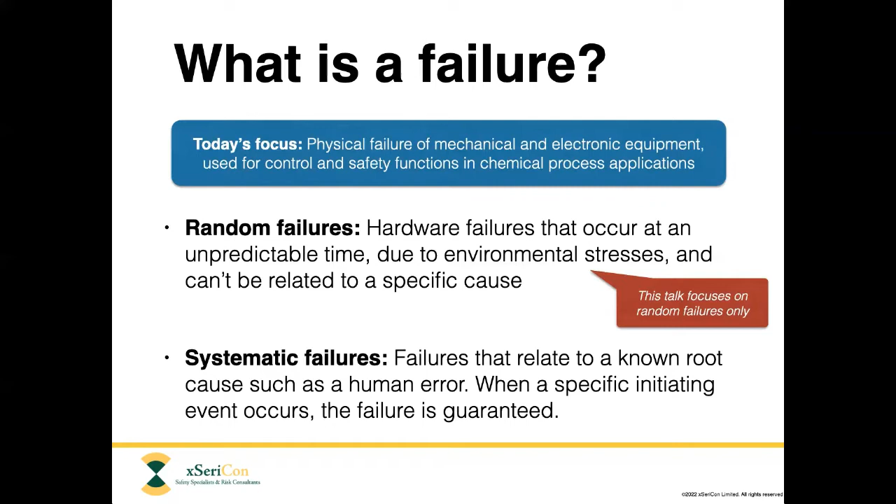And that's why we're going to be focusing today on random failures, because the approach you take for mitigating those failures is very different to those failures which can be prevented. So, moving on. Let's have a look at failure rates, and here is what is commonly known as the bathtub curve. It apparently looks like a bath. So if you imagine yourself lying with your head at the left-hand end and your feet on the right hand, you can see that it slightly resembles a bathtub.

This is a curve depicting failure rate against time in service. It's not the failure rate of a single piece of hardware. Rather, it's the failure rate of a whole population of hardware. So if you imagine a particular valve has been manufactured and there's 10,000 of them out in service, and if you plot how many of them fail against their time in service, you will expect to see a curve which very, very often looks something like this.

So we can divide the bathtub curve into three sections. You have your burn-in period. It's sometimes referred to as infant mortality. That's the point at which any weak items fail. So you start off with seeing higher failure rates early on in the time in service. Then you reach a point at which you have quite a low failure rate and relatively constant. It might be dropping slightly, but when we work with failure rates, we actually model it as a constant failure rate, shown by the green line there.

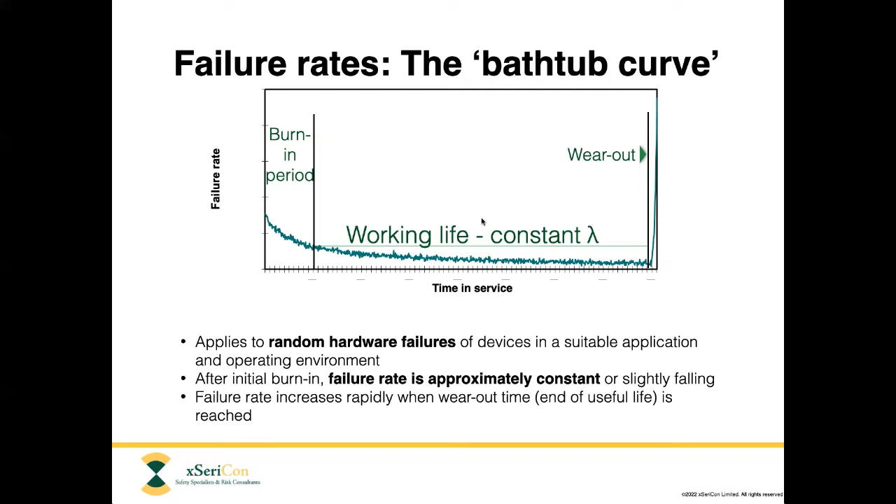So how do we fail? How do we express failure rate mathematically? You'll have seen this, the Greek symbol lambda, in the previous slide. That's the letter that we use to represent random hardware failure rates. And we assume it to be constant over the device's lifetime. Its dimension is in failures per unit of time. Of course, failures don't have a unit, so it's per time.

You might want to measure it in failures per year or per hour, but in safety systems particularly, and also in a lot of control systems, you would want far more reliable equipment. So another unit that's used is FIT, failure in time, and that's defined as one failure per billion hours. So that is approximately a failure every 100,000 years, I think, a little bit over that.

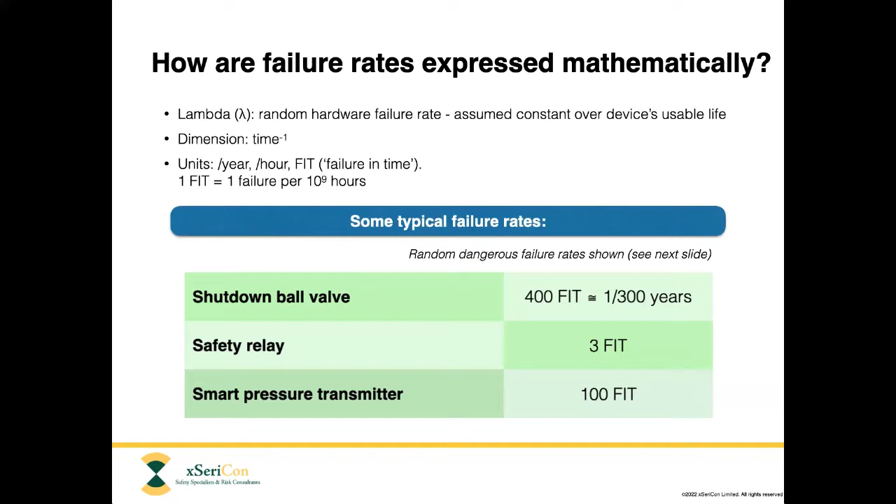Let's talk about failure modes for a little bit. So obviously with random failures, there's not a lot of point in talking about the cause, because we've defined random failures as those that it's hard to link to the cause. But we can talk about them in terms of their effect. The most important effect that we want to look at are what are called dangerous failures.

So a SIF, a safety instrumented function, that's a safety piece of equipment. A dangerous failure would be one in which, when it was required to act to bring a dangerous state into a safe state, it was unable to do so. Or if it's got redundancy, then you have loss of redundancy. So it's unable to, but there may be another piece of equipment that can.

So here's an example. We have a spring return actuator. It's required to bring the process into a safe state. And if it's spring return, you would expect that in most cases the spring would bring it to that safe state. If the spring breaks, then when you have loss of power and your actuator is unable to move under power, the broken spring is unable to move it into a safe state, and that would be a dangerous failure.

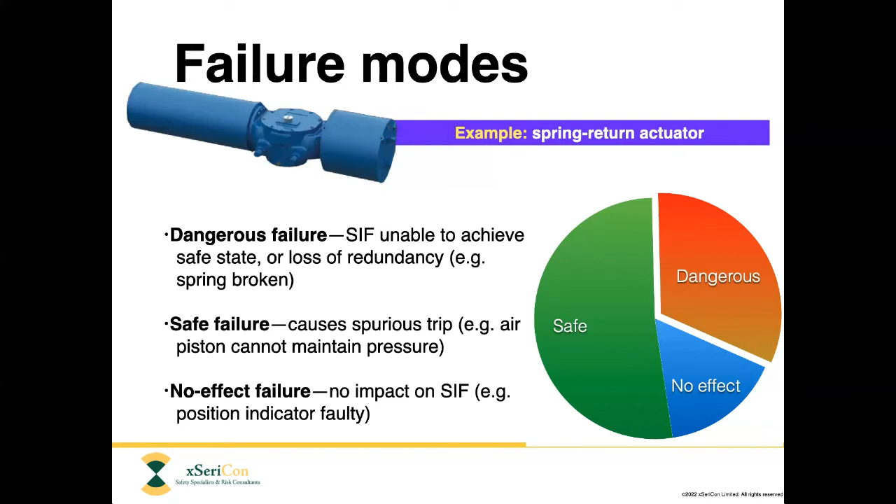And then there's a third one, just to complete the set. There's no effect failures. So there's some sort of failure on your piece of hardware which doesn't affect its ability to perform its function. So the example here is the position indicator is faulty. It doesn't perform exactly as it's designed to. Maintenance may find it difficult to perform checks because the position indicator is not correct, but when it's required to act, it's able to act, and so it's got no effect.

Just quickly look at other failure measures than lambda, the failure rate. You might have come across mean time to failure, mean time between failure, or mean time to failure spurious. Mean time to failure, I actually gave examples of when I was talking about the lambda. I said, well, a 400 FIT would be 300 years between failures. Just to say, it's the inverse of the failure rate. It does not mean that the device will last for 300 years.

It means rather that if you have a population of devices, and let's take an example, let's say we have 300 devices that all start service at the same time. We're going to put the conditions on that all of them will be replaced before or at the end of their useful life, and that any that break are repaired or replaced. You would expect to see out of those 300 devices an average of about one of them failing every year. And that's the meaning of mean time to failure. That 300 years is a collective measure still.

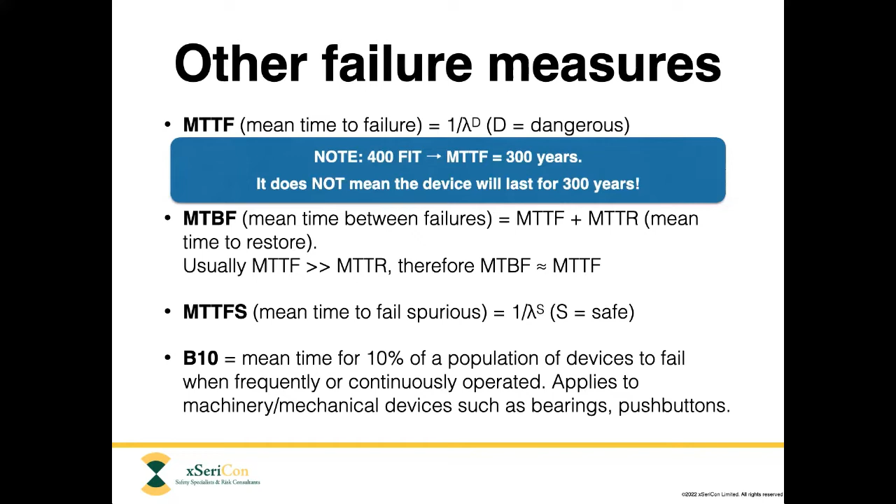It's important to understand the concept of mission time here because there's a common misconception. So let's first define mission time. You've heard me talking about the useful life. That's the bottom of the bathtub in the bathtub curve. It's the period of relatively constant failure rate. Mission time is the time that the engineers in a process determine they're going to leave a piece of equipment in before they repair, replace, or refurbish the equipment.

You can see here that it's quite obvious that the mission time should be less than or equal to the useful life of the piece of equipment. And obviously, because you're using a lot of different pieces of equipment, each of them has their own individual useful life. So if you were wanting to maximize your mission time for each piece of equipment, you would have different mission times for a lot of different pieces of equipment.

The reason it's important to understand this concept of mission time is because in projects that we've come across, a very common confusion is to confuse the plant lifetime with mission time. And that's fine if you have a short plant lifetime. But if, as you would typically expect, you have a plant lifetime of maybe 30 years, a lot of the pieces of equipment will have a useful life that's shorter than 30 years. And that confusion means that there's no planning for replacement of those pieces of equipment when they are well into their wear out phase of their life, and therefore the failure rates that were used to calculate the reliability of the equipment are not valid.

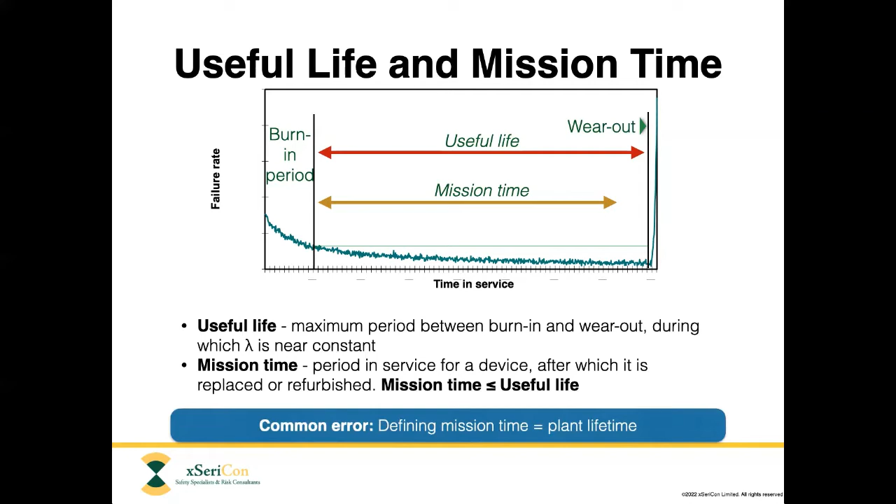Another approach is to do an FMEA, because when you have a product which has not been in service for long enough, doesn't have the millions of service hours required for the data for field performance, you could perform a failure modes and effects analysis. That's where you perform an analysis where you consider the components of the part, you consider the reliability of the components, you break down the failure into different causes, and it's a really extensive process for considering how the part might fail. Of course, it's not as good as field performance.

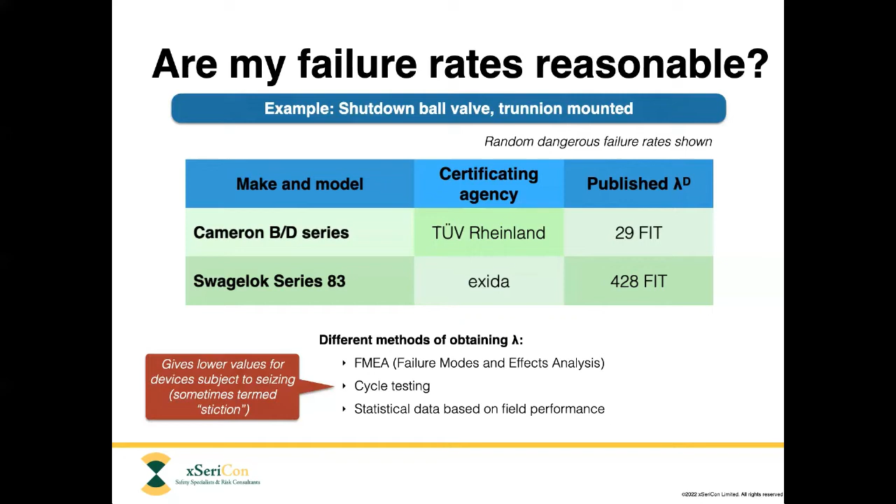So we've heard there from Joe, who's very nicely covered a description of what failure rates mean and where they come from. So the next question is, well, how do we use them and why are they important? And I'd like to give you some examples of the types of application of random hardware failure rates that we typically encounter in our risk analysis studies. And I'm going to cover 4 out of the 5 methods that you see on your screen now. The one I'm going to skip, just in order to save a little bit of time, is the third one, failure modes and effects analysis, or FMEA. If you're interested in FMEA, then please let us know afterwards, because we're happy to share our knowledge on that, and we could even run a webinar on that if there is interest.

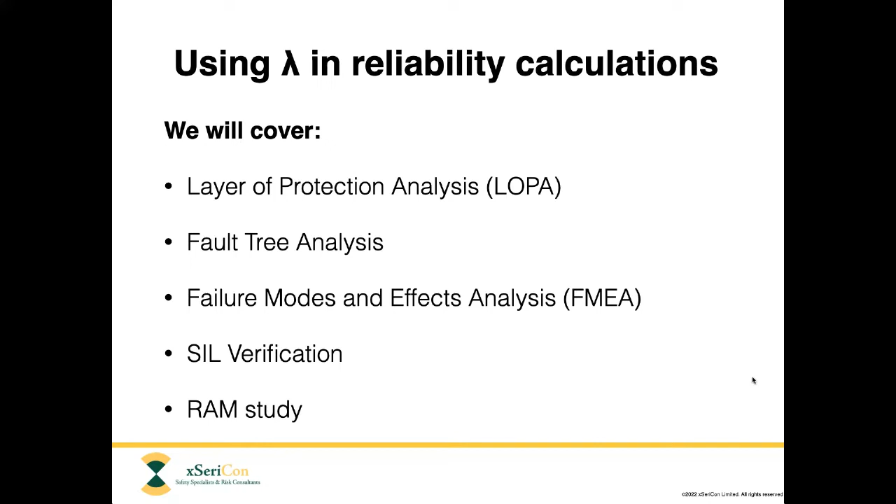First of all, LOPA. LOPA is a layer of protection analysis, which is becoming one of the most common methods for selecting the SIL target of a safety instrumented function. Now, SIL is a measure of the level of reliability required by a safety function, such as, let's say you've got a trip which operates on high pressure or low level in a vessel to prevent some unwanted consequence. So you need to assess the level of reliability required from that function, which is expressed in terms of a SIL, for example, SIL 1, SIL 2, etc. And the lambda value, the random hardware failure rate of the individual elements within the safety function, is one of the key input values to that.

Now, actually, I should correct myself. It's not the lambda value of the safety function. It's lambda values of the components that may fail, leading to a demand on the safety function. Because the LOPA analysis relies on knowing the frequency of the potential causes of upset that lead to a demand on the safety function. And those triggers can come from other pieces of equipment malfunctioning. So in the blue box, you can see, for example, you may have an emergency shutdown valve, which is supposed to be normally open, but if it malfunctions and closes, then it can lead to all kinds of knock-on effects, eventually leading to demand on a SIF.

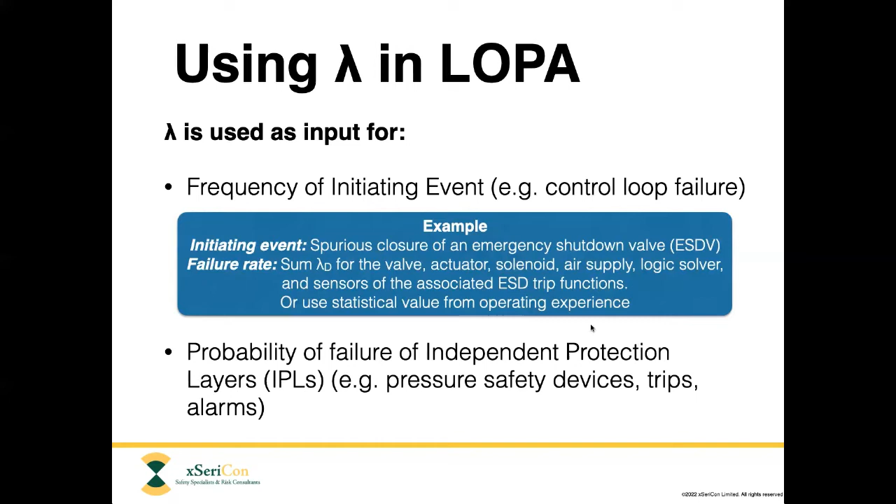So the next example of a technique that relies on lambda values as inputs is fault tree analysis, which is my personal favorite out of all the analytical techniques that we use these days. And just to give you a very simple example, supposing we are trying to estimate the frequency of the failure of lighting within a given area, let's say a public area such as a supermarket or a cinema, or maybe the emergency lighting in an operating chemical plant.

And just to give an extremely simple example, the lighting can be supplied by a main power supply or by a battery backup system. And the lighting will fail if both of those power supplies are simultaneously unavailable. So the way we would analyze this in a fault tree is to treat the main power failure as the main source of power, the normal default source, and to use the lambda values for failure of the components of the power system, add them up in order to come up with a total predicted frequency for the power failure. For the battery backup system failure, we have to assess that as a probability of unavailability of the system.

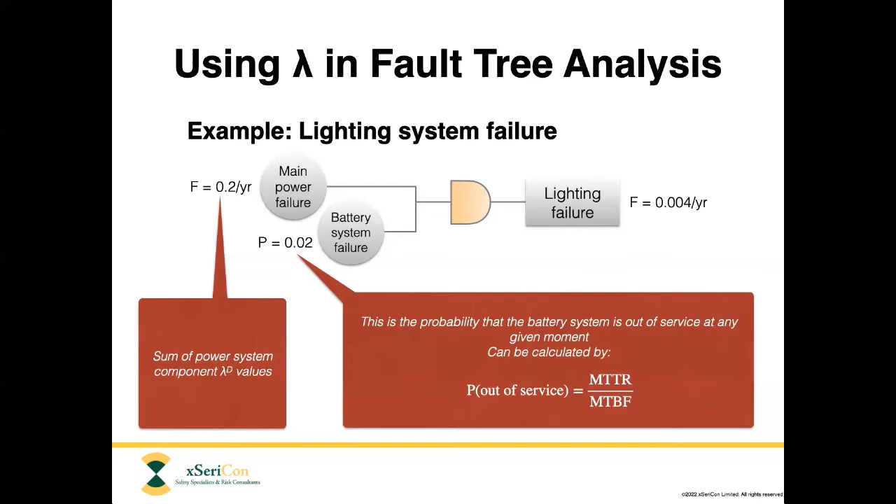Joe, can I have the next slide, please?

Another very important use of lambda values is in a technique known as SIL verification. A SIL verification is the task of calculating the predicted unavailability of a safety instrumented function. Which, if the function is very simple, we can do simply by adding up the lambda values of the elements in the function, such as the sensors and the logic solver and the final elements, the shutdown valves or whatever we have that actually act on the process.

But the calculation very quickly becomes complicated as soon as we start introducing factors such as proof testing and redundancy within the function. And at that point, it becomes too complicated to do a quick calculation on the back of an envelope or in an Excel spreadsheet. So that's when people typically turn to dedicated software for that purpose.

What you can see on your screen at the moment is a screenshot from our own software offering, which is called SILability. And you can see the box on the left side where the lambda values of this particular component have been entered. The component in question is the Yokogawa pressure transmitter. So those lambda values have been obtained from some database or some other source of data, which I'll tell you about in a moment, and entered into the calculation there.

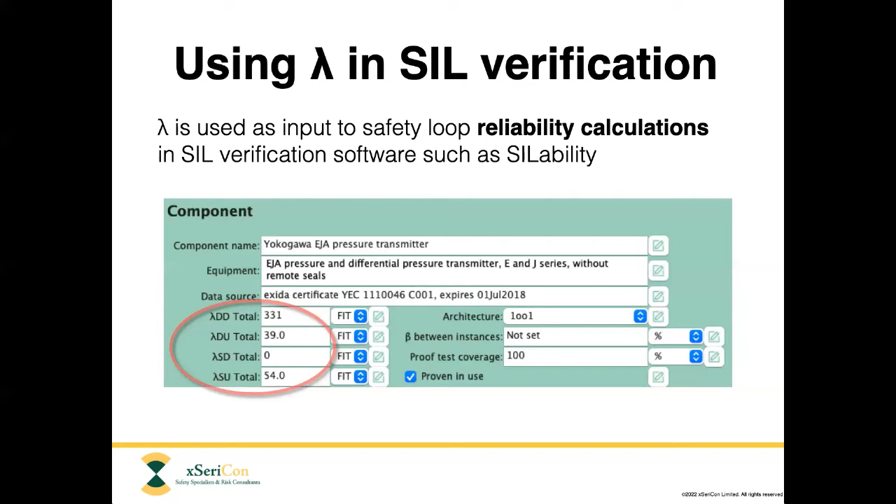And the final technique that uses lambda values that I'd like to tell you about is RAM study. RAM is reliability, availability, maintainability study. And it's a very powerful technique that's used to predict the expected availability of a plant as a whole. And this is to see if we can meet a target that's set usually by management.

So let's say, for example, we're operating some kind of critical utility or some plant where high availability of the plant is critically important, either for safety purposes or for economic reasons. Let's say we set a 98 or 97% availability or uptime for the plant as a whole. How can we assess whether we are actually likely to achieve that? Well, RAM study is the way to do that.

And it relies on doing calculations which can be based on a method such as a reliability block diagram, which you can see a very simple example of on the screen now. The reliability block diagram is a simple model of the architecture of the system, showing how you might regard as information flow going from the left side to the right side. And as long as there is a path for information to flow from the left to the right, then the system works. But as soon as any component of the system fails, then it may block the flow of information, and then the system as a whole is failed.

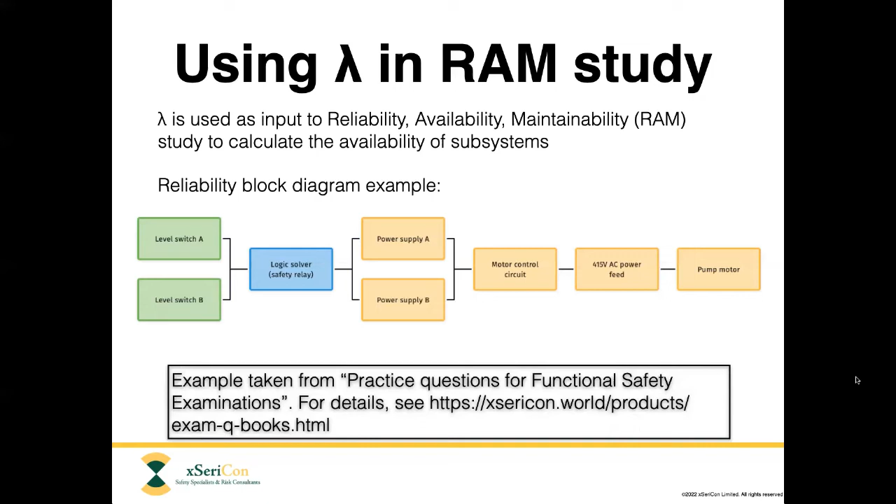Okay. So much for what failure rates mean and why they're important and how to use them. Well, now the crunch question is, all right, now I know I need them, so where do I get them from? So we'd like to suggest some possible sources. First of all, there are databases available.

Our own software for SIL verification and that of other providers sometimes comes with a built-in failure rate database, which you can search, and then you can transfer the values automatically into your calculation. And even if you're not actually using the software to do the calculations, if you require the lambda values for some other purpose, you can still extract the numbers from the database easily enough. So that's one source, and our own database has got more than 3,000 sets of data in it.

Another option is to find freely available sources of data on the web. One of those is provided by Exida. It's called the Safety Automation Equipment List, which you can find by searching their website. And that's quite a nice set of searchable equipment where you can search for the type or the name of equipment and find out if there's a SIL certificate or maybe an FMEA report provided there in that equipment list that allows you to obtain the lambda values.

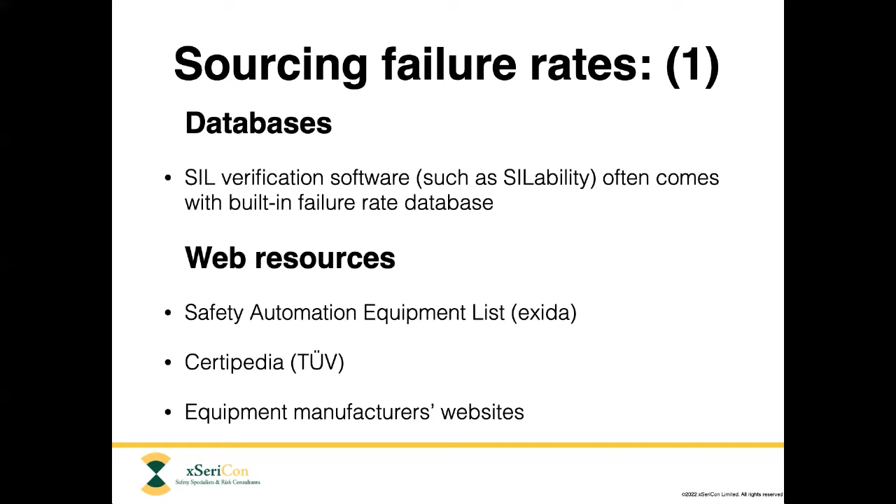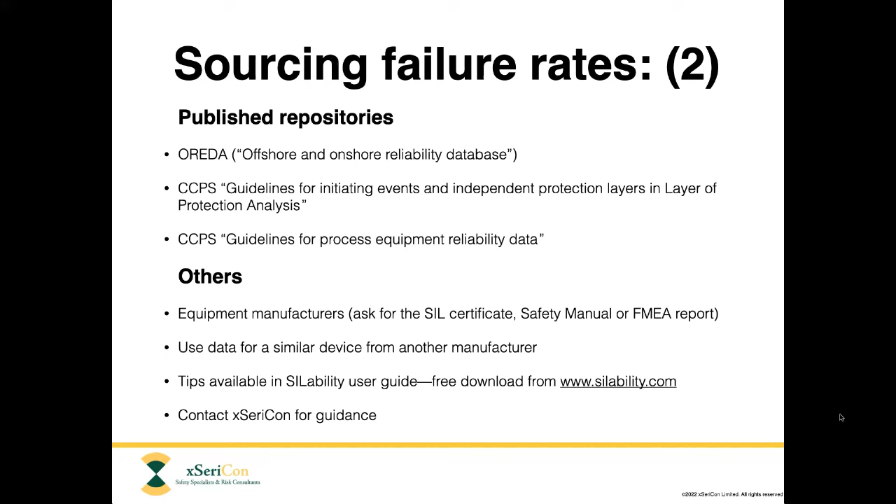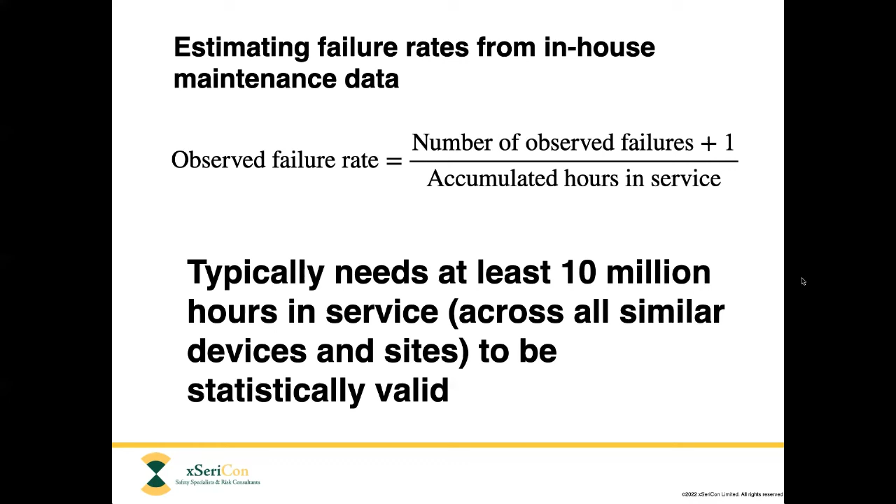Well, that's all that we wanted to cover in our talk today. Just a quick helicopter overview of lambda values, what they mean and how to use them and how to get them. The floor is open now to questions.